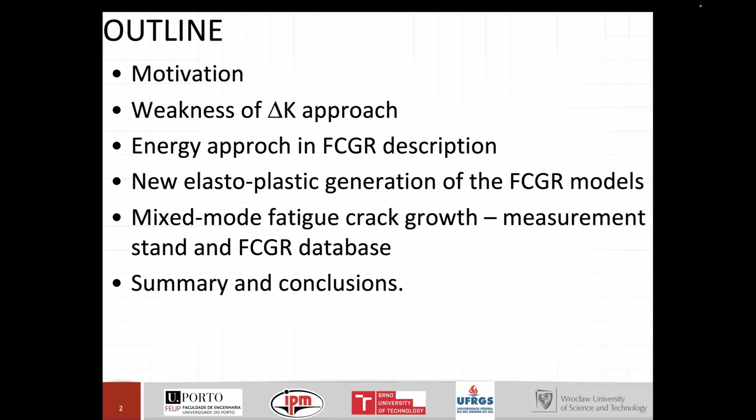I'll skip the outline of the presentation since it's too short to discuss, but in general I'd like to show you some approaches based on energy for avoiding the mean stress effect. The motivation is always the same.

As we discussed about fatigue lifetime prediction, whether it's fatigue or fatigue growth rate, we are still in the same position, because in both cases we have a problem describing the invariant fatigue growth process independent from stress ratio.

If you add crucial points like multi-axiality and many other aspects, we are in almost the worst case. Let's see this, my favorite diagram, which I found in the literature - and not about damage, because we could discuss damage in large structures for a long time.

If we look at wind turbines or bridges, we see that the load irregularity and the required number of cycles to failure is high. So, of course, S355 is still very popular in common sections.

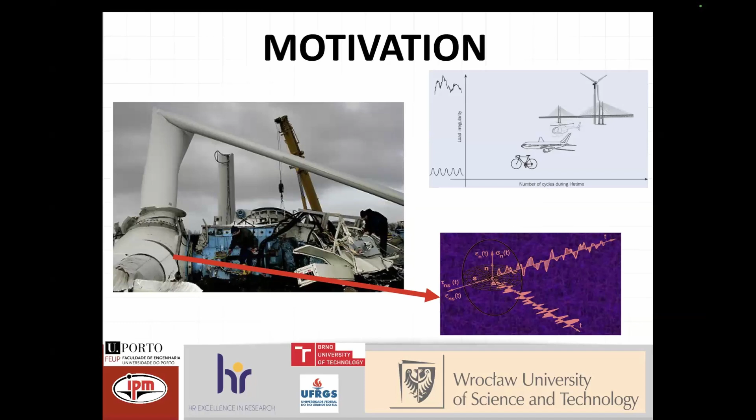Coming straight to the points in calculation of crack growth rate or the precritical period of crack growth, we have all models. Most of them are semi-empirical. I've brought just a few of the old ones.

Of course, old theory always looks good, and probably the most recognized, like E equals mc squared in physics, is the Paris law model, which is used by many researchers. It's the simplest, the easiest way, the base for all others - yes, industry loves it.

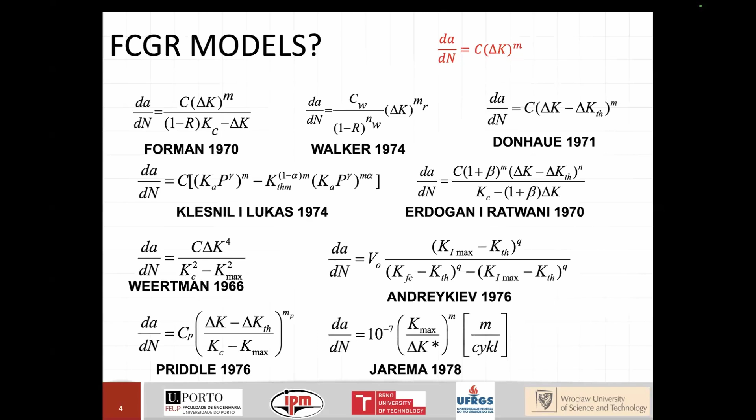Of course, in some aerospace industry we can discuss using the Nasgro model or others that are more complicated, but estimation of some parameters is crazy.

We started many years ago, with my mentors and the new generation, on the energy approach based on thermodynamics - an energy balance, also presented today by Professor Vilio, and the concept of brick models and fatigue of elementary bricks perfectly fits in this line.

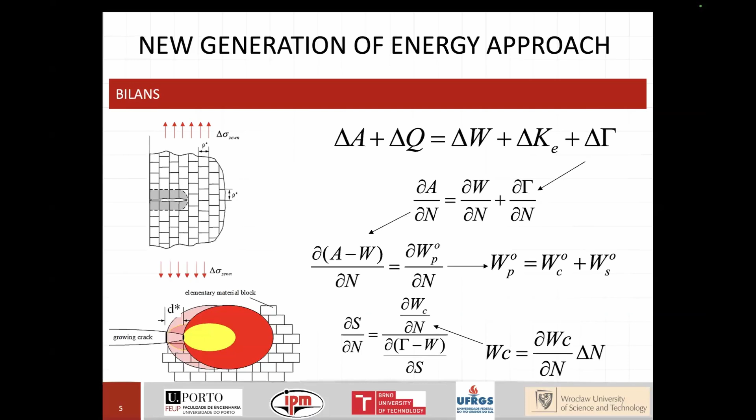I can go to the final conclusion, included in the paper performed by Professor Szata and me in 2009.

We can see that if we use some specific energy components for the description, composing the energy by cyclic and static components, we can calculate or propose not just one model - this is one representative group of models, based on dissipated energy.

I'd like to discuss this at length, but time is limited. What is the meaning of proper energy in cyclic loading? Where do we need to measure this energy?

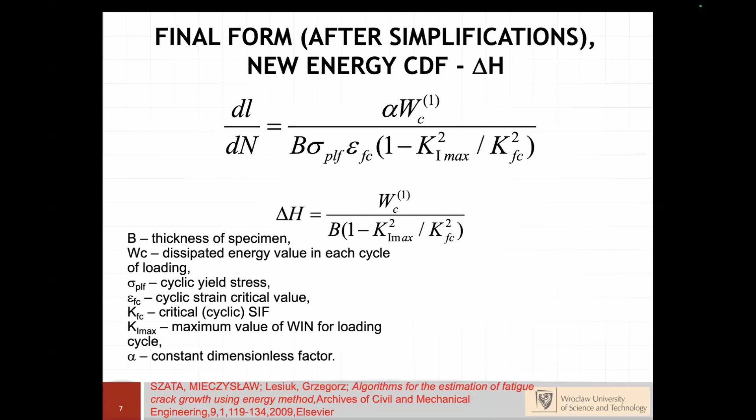In our case, we selected dissipated energy in each cycle of loading based on the hysteresis loops. But you can see in this new delta H quantity, we also have K1 max, which refers to the maximum value of the stress intensity factor, as well as the critical fatigue stress intensity factor.

Typically, the organization of the measurement stand is more or less similar to the classical ASTM E647, but it's problematic to measure the area under the hysteresis loop due to very small changes. Colleagues working in fatigue are happier, because the loop is much larger and wider.

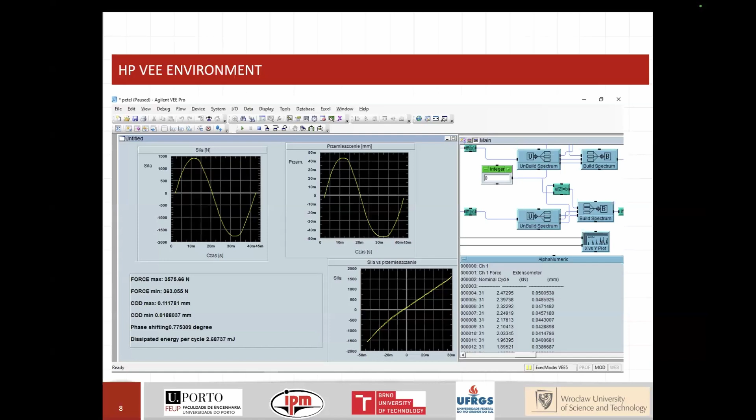In this case, it also involves an HP Hewlett-Packard environment with a special procedure for properly measuring the energy in situ during the experiment.

As we can see, it's Polish grade 18G2A, internationally recognized as S355. We can see that for mode 1, different stress ratios produce shifted curves, which is typical for various aspects.

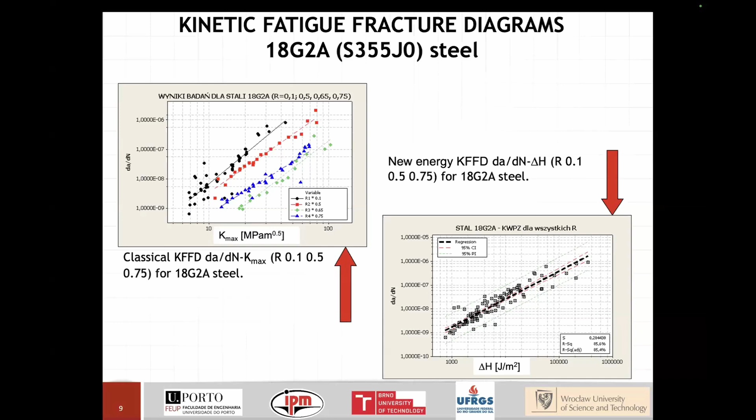But if we use the energy component, we have all points consolidated into one line.

In the next steps, we tried to combine the energy parameter, building a new energy parameter by analyzing the literature with the concept of static and cyclic plastic zones. We can find in the literature some links to the cyclic J integral.

Of course, this is a long discussion also in the literature if the cyclic J integral should be called J integral still, or maybe we can treat it as an energy parameter and interpretation of the differences in the potential energy in growing cracks.

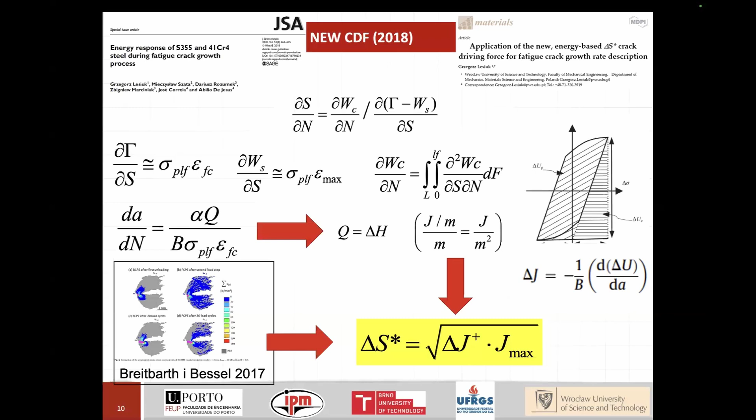Anyway, if we propose, for instance, an elastoplastic energy parameter, we can see, for instance, delta S star, similar to the Kujawski model in the elastic stress intensity factor range. It's the positive part of delta J as well as J max.

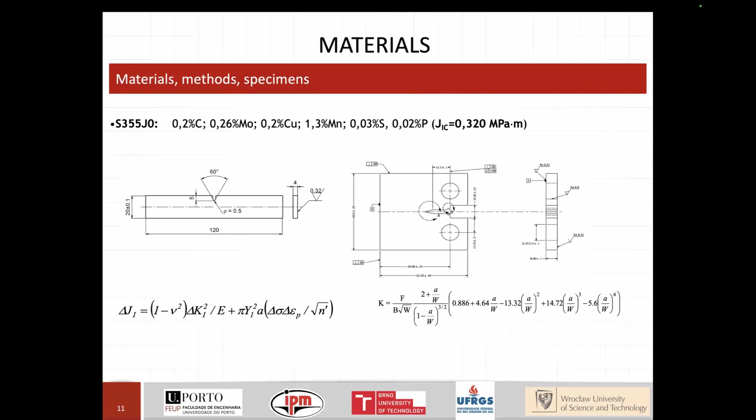And then we validated it for not only mode 1, but also mixed mode loading. I can show you just for mode 1, for different stress ratios, we can see even if we replace delta K by the elastoplastic parameter, delta J, calculated numerically or developed using numerical algorithms, we still have the problem with the stress ratio effect, which is an inherent part of the description of this process.

But if we use two parametric models, driving force models, for the description of the fatigue crack growth rate, we see full consistency into one line for different stress ratios.

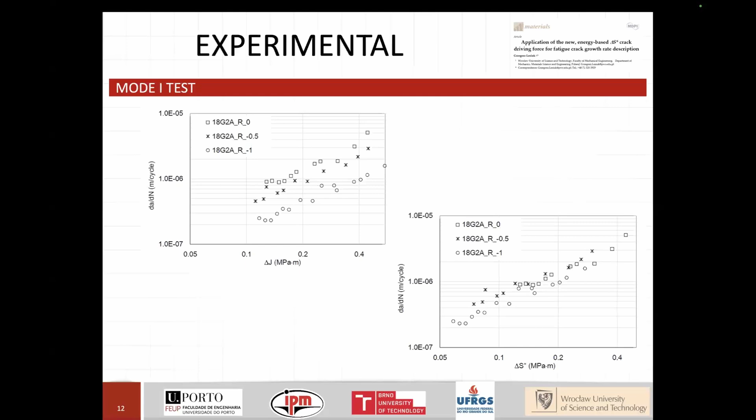In the next steps, we tried to develop and validate the models also for mixed mode loading conditions. From time to time, this is also a vital and crucial point, because in mixed mode loading, we can state that at the final stage, everything under mixed mode loading will tend to mode 1.

But at the beginning, we are extremely interested in the crack paths and also crack growth rate under mixed mode loading conditions. Of course, there are no standards, so we are not as comfortable as with ASTM E647, but there is some recommendation from the literature.

We used Richard's proposal from the 80s about building this type of measurement stand using a special CTS specimen, and by different load angles, we trigger a different mixity ratio.

And of course we are supported by numerical analysis because even—sorry, can we come back? It's just one direction probably. Oh yeah, okay, I see.

Sorry, just briefly. Even if we have formulas, they are valid for a stationary crack, so for static conditions. We cannot use them anyway in cyclic loading, but of course it's not a problem to calculate delta K, delta J, or many other energy parameters using numerical analysis.

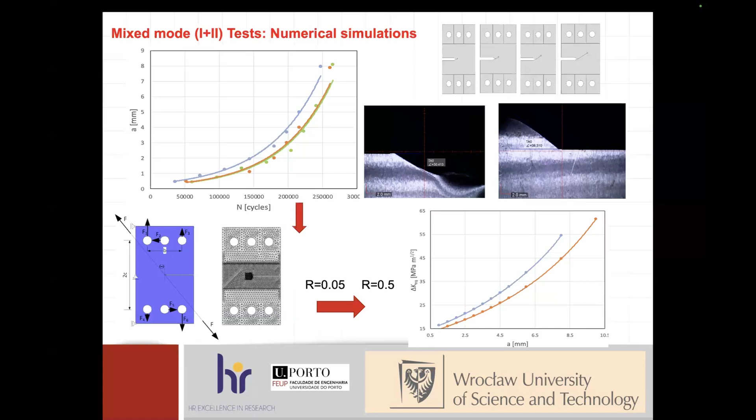And of course, post-processing using tiled microscopic analysis of the crack paths, we calculate at every point, every crack front tip parameter. Then, during the experiments, we collected points for mode 1+2 and 1+3 using torsion, tension, and bending in our case.

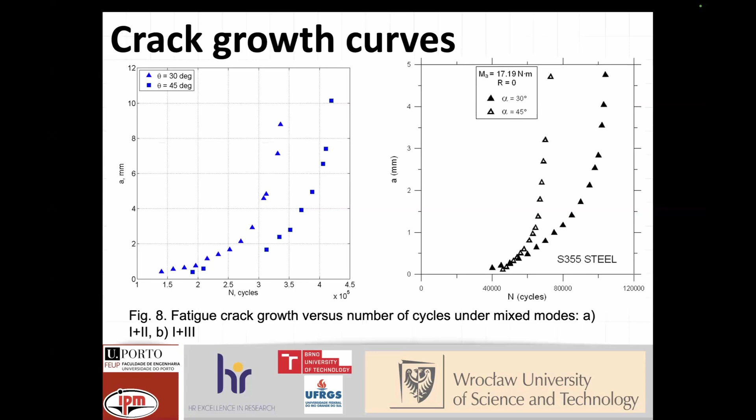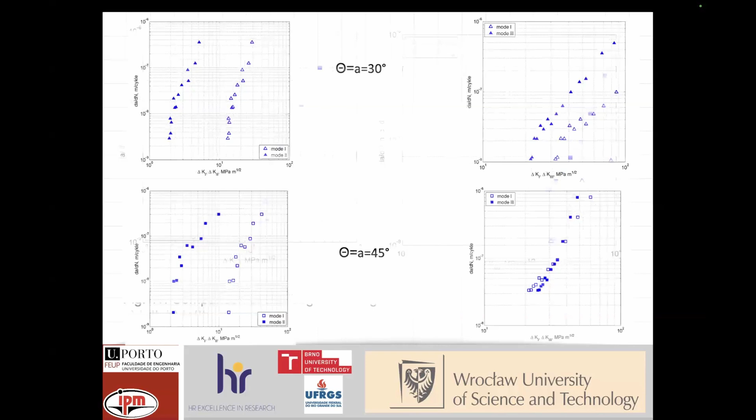And after that, one of the most important points is to generate the kinetic fatigue fracture diagrams. Here with the delta K approach, we can see that for delta K1, delta K3, we can separate the modes. Of course, this is very easy and well known, though we need to use sometimes an equivalent delta K, which is also clear what we need to do.

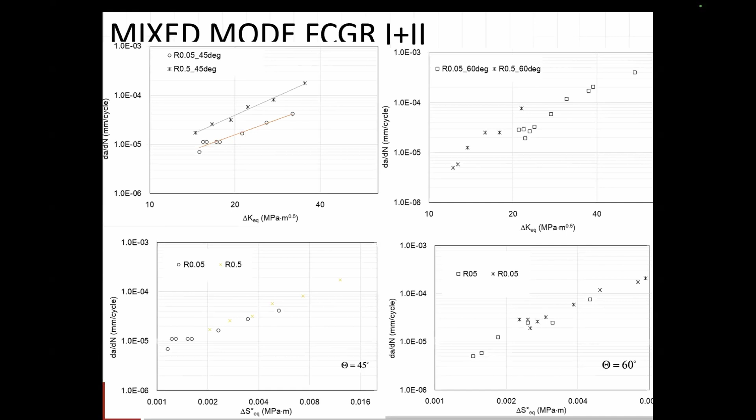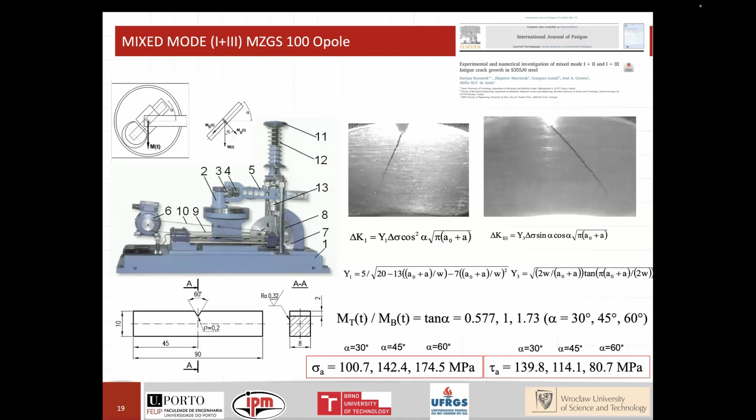And, as I discussed previously, we also tested with our friends in Opole, Professor Rozumek and co-authors of the paper, under mode 1+3. We constructed different diagrams also for S355 steel, and as discussed, even if we used an elastoplastic parameter, we still have the influence of the mean stress effect on the fatigue fracture diagram.

And also, finally, if we use an energy component, we have full consistency of the data into one line.

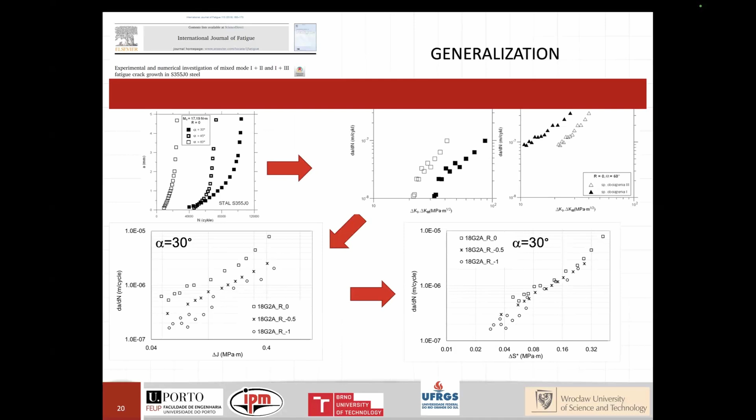Why is this so important? Going quickly to the conclusions: usually, typically in industry we need to build a generalized model. For instance, we have variable amplitude or different approaches, and every time we need to estimate the constants for Paris law or similar.

Of course, we can use different models, but it means that the description using delta K or delta J is still not sufficient. We need to develop some models for generalized modeling.

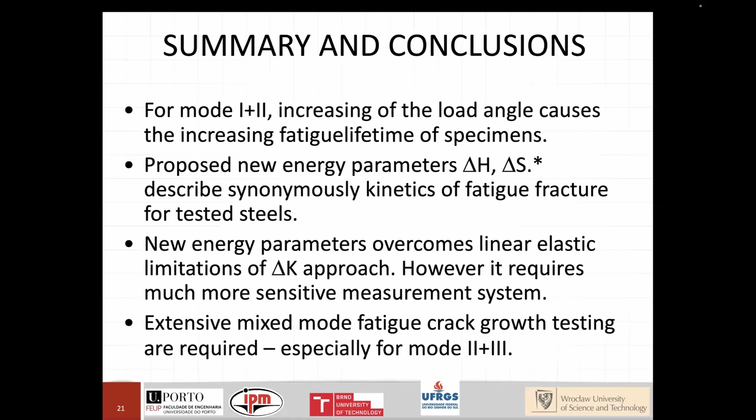In our case, we are happy to announce that it works for mode 1, mode 2, and also maybe in the future we need to develop it for different modes. Thank you for your attention.